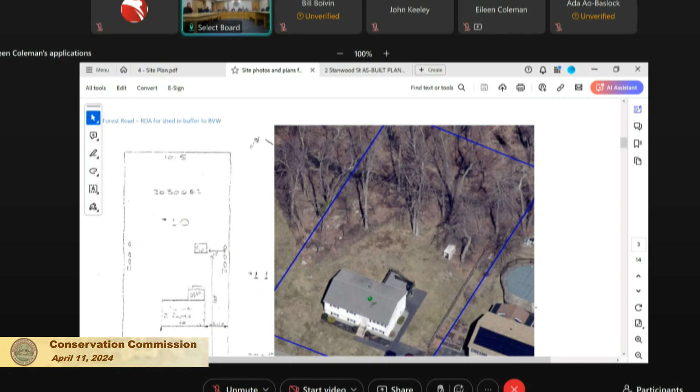Yeah, I will. So like Mr. Baslock explained, he wants to replace this very, very tiny little shed with something a little bit more substantial. There is a stream channel in the back here, which runs, I think west to east, and is at least intermittently full. There's some wetland very close behind the shed, and there's actually a little bit of dumping into the wetlands, so we put something into the proposed conditions for him to take that out. He wants to replace it in the same place with a slightly bigger shed. I don't have any issues with that bigger shed going in, it's just going to go in on a gravel pad. We would just like it to go no closer than existing, and for him to stop dumping the yard waste into the wetland, just move it off somewhere else. Really, that's it, it's pretty simple.

Sounds very straightforward. Okay, let's see if there's any other questions or comments. Ed? Nothing really, other than there's noticeably some grass and whatnot being thrown back there. That should be cleaned out and should not be dumped in that area.

Okay, Rob? I guess just one question. I know sometimes when we do sheds, we sort of have the elevated sheds with an air gap versus sheds that are in ground contact. I remember we discussed one in the floodplain where the building department suggested it be elevated. In this case, it's not in the floodplain, it's not in the wetland, it is pretty close to the wetland, so it didn't seem necessary to ask him to do something the shed manufacturer wasn't already proposing. Didn't really feel necessary to ask for something else. Yeah, okay, good question.

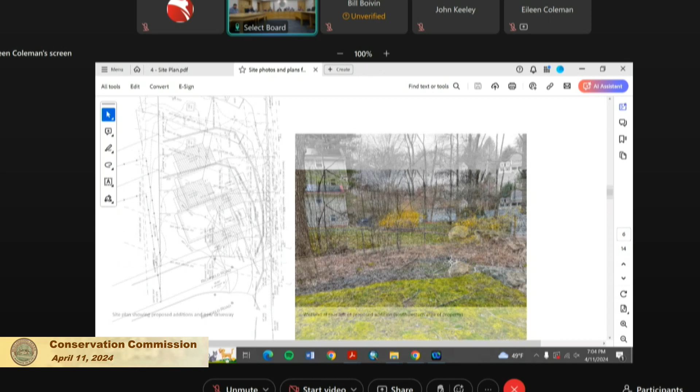This is the wetland sort of at the side of the house. This is the wetland that's been restored, and it's looking really good. This is the channel on the other side of the house. So just to reiterate, it's a pretty tight space they're working in. They are adding two additions, one of which is coming closer than the no-build setback.

But they are reducing the impervious overall, and I think this is about as good a project, about as well designed a project as it can be. They're also proposing to do some restoration plantings as well at the side.

Did I miss anything? We had already done some restoration plantings in the back, and so we'll be just adding, I think we decided on 20 plants that'll go along the other side of where the wetlands are that would be disturbed. Right, and those will be native, so he'll work with us or with his wetland scientist to choose something appropriate. It's just a few feet away from where the current driveway is now, but is going to be where the driveway is being pulled back after the construction.

And as it turns out, just looking at this again, the new addition is about the same distance from the wetland as the current house is from the existing stream.

Okay, so my recollection is that there was nothing further the applicant needed to provide us.

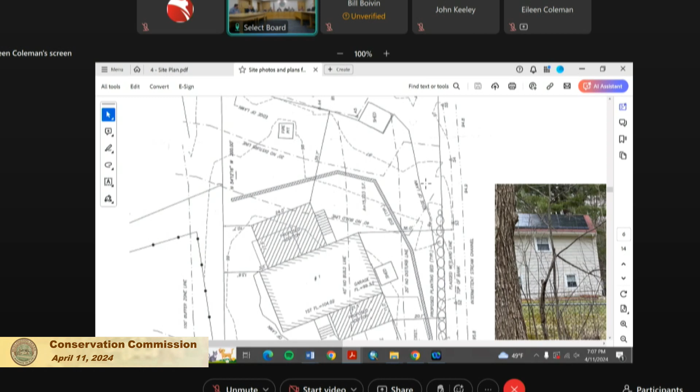All right, so everyone spoke, we're all set? This is a hearing, is there anyone in the audience who would like to make a statement about 1 Richfield Road? I had opened it. All right, that does not appear to be the case.

So, Mr. Collins, has Mr. Collins seen a draft of the decisions yet? He received it, I emailed the drafts earlier. Do you want to have a draft? Maybe we have a spare draft for you to look at, or you're all set? I've already been flipping through it, I'm set. You can also go on with it, we're going to review it, but I didn't want to, if you hadn't seen it. I have seen this, yes. Okay, thank you. We usually forward it along in case there's anything egregious.

Could I have a motion to close the hearing on DEP file number 122-699? So moved. Second. Okay, all those in favor? 5-0, are you abstaining? I'm going to abstain, yeah. 5-0-1, okay.

Now, do you want to review the document, Eileen? If you want, I can do it fairly briefly. He has seen it, if it's not necessary then we can move ahead. I didn't have any objections to it. Okay, so I'm just seeing if there's anything here that you do need to go over. The commission got it ahead of time, so I guess not, really, on the bylaw decision. It's all very straightforward and standard, if you prefer to leave it. Bonds, thank you, bond is 2,500, I think.

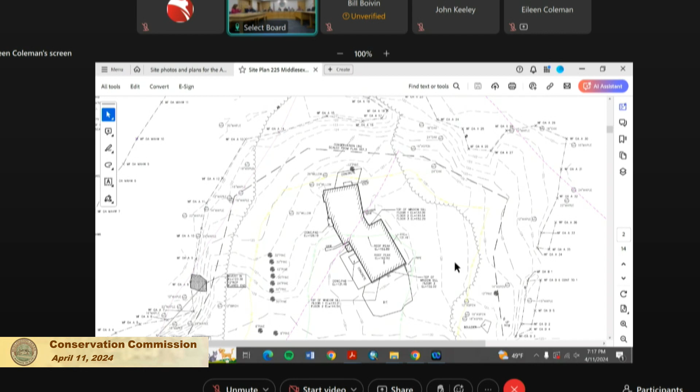Obviously, since 2016 was a pretty significant time ago, we had the wetlands reflagged by the same consultant that did it previously, so we had Oxbow go out there and reflag the BVW. There is an isolated wetland, and riverfront area associated with Vine Brook, and the other brook on the site is associated with local regulatory streams of Burlington, so it also has a riverfront area. There's only a small area, smack right in front of the Kent Cottage, that doesn't fall within a buffer zone of the river or the wetland area on the site.

As part of the previous application and this application, most of you have probably only seen the stone part of the Kent Cottage, but behind it is an ugly concrete block structure that was added onto it. When we were here previously, and previously I had met with the Historic Commission, which the project will meet again next week informally, it was understood that was going to come down, that there was no need to keep that portion of the structure.

So as we move forward, we're moving forward with the stone building, the front part of the Kent Cottage. It's in even more disrepair, if you can believe it, than it was in 2016. The inside is a mess. So essentially what we're doing is reconstructing the exterior.

And what we're doing is putting 2 residential units within that structure. So 2 townhome units, each with 2 bedrooms. And what we're doing here, this is the layout plan, is creating essentially a little residential neighborhood out of the Kent Cottage. Some of the logistics around this, obviously we're not moving the Kent Cottage, it's there at an elevation.

How do we get everything around it? The previous application had one large glass structure attached to it, not trying to mimic the Kent Cottage, but in contrast to it and showcasing it, with parking lots on the front and the side.

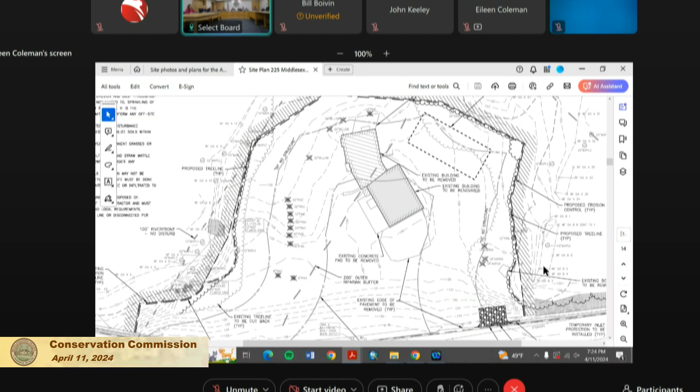Besides that, we did provide you with a narrative regarding our riverfront alternatives analysis. You'll notice it's pretty similar to the one we did previously. We're about the same impervious as we were when we were here before with the office building, as far as the addition of impervious to the park. I believe we're just over 31,000 square feet of impervious for the total site construction we're looking to add.

We do have a floodplain on the site, but we're not working within the floodplain. We are outside the 100-foot riverfront area, and outside the no-disturb and no-structure setbacks. There is now a habitat area that exists on this site—we're touching it when you bring it in and overlay the line work within this site. We're just touching about 900 square feet, right where that double catch basin is in the corner. Your future plans will have that; that line didn't get turned on for some reason in this set.

It's been put on the plans, and we have sent it to Natural Heritage. So it's been mailed to them, and they reached out to us, obviously, through you, John, and through Kristen, who had put her email on there, and we've sent them PDFs to follow up with the hard copies that they received.

So we'll be looking for information from them. We did go to Board of Health on Tuesday night and got approval. This is our first night, obviously, with the commission. We have a meeting next week with Historic, and then Planning Board starts next Thursday. So no revisions have been made to the plans yet. When I checked DEP sites, we don't have a DEP file number yet or comments.

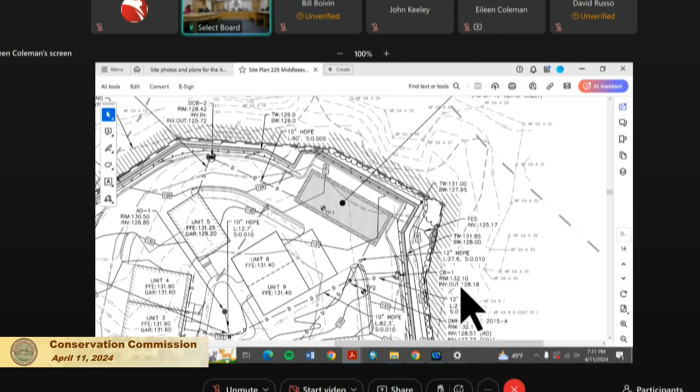It looks like it could be that, yeah. And you basically stack them next to each other, and they create - and they have a porous bottom. And they're filled with stone? Nope, they're open.

Okay, so there's stone around them. So, since we're on this now, for the benefit of the commission, what is the purpose of this structure? Is it to take clean water? Is it to take water off the parking lot as well, stormwater? Right, so all of the devices that we're using to collect stormwater end here. And so it's basically the same thing you'd see if you saw a StormTech system or a pipe and stone system. It's an infiltration system.

It's just what it does is it takes the smallest footprint possible, because you're not losing out on any of the curvature of, say, the pipe, and then you're only getting 40% of the stone. It's basically open as far as the boxes that go together. And so there is a section, though, that the pipe that comes from the double catch basin comes into that part of the system, into an area of the BMP where there's a section of these crates that are wrapped in filter fabric, so additional sediment can settle out in that row. It's similar to an isolator row you see with a StormTech, in that you wrap it and the sediment falls out in that area.

Right, we may come back to that, so the commissioners may have questions on it.

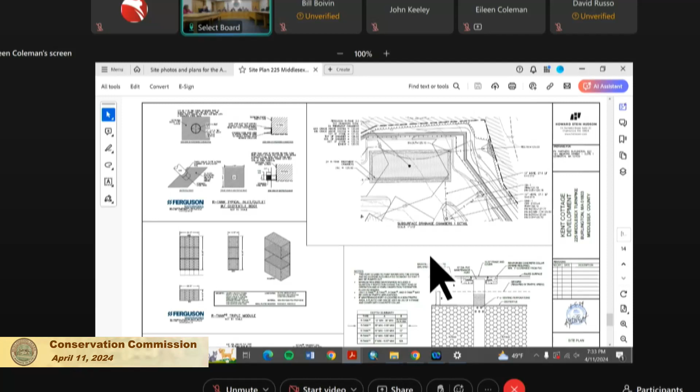All right, so let's start with Ed. Do you have any comment or question, or we can go back to you if you'd like? The actual road going around, what's the surface on that?

The driveway itself is pavement. You go right up to the garage doors of each unit with the pavement? With the pavement, that's correct. Have you considered pavers or anything like that? The reason I say is, I found it to be really useful where I am over at the Reserve at Seven Springs. And when that water comes running around the road and just happens to hit the driveways, it's gone.

Just curious, it's not something that's expected. Is that the fire way you're talking about? Behind your building, further down, there's like a fire access, and I think they made it out of pervious pavers?

Is that what you're talking about? Well, like that, but we all have pavers in front of our garage doors. Oh, you do? When it rains, are they pervious? Is the road water pervious too?

Do you know if they have the full profile of a porous pavement application under them? Yeah, they do. So have they deteriorated? That development's been there a while. I mean, after 10 years, it still works. I'm kind of amazed, to tell you the truth. I've never seen that before.

Is that something you would consider at least looking at? We could look at alternative materials for in front of the garage doors, yeah. Okay, the water never makes it to the garage door. That's the key.

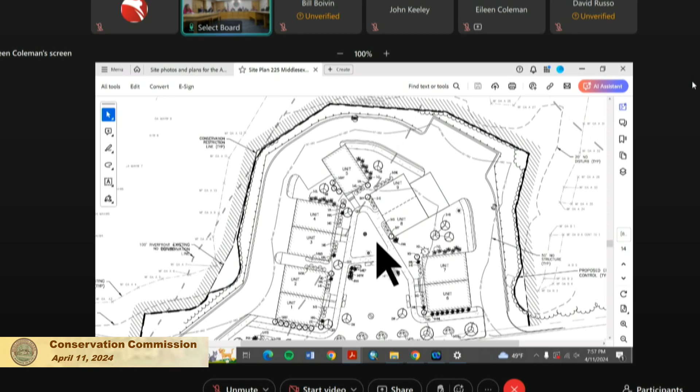That's the big square? No, it's the circle, the other DMH that's called out as a CDS - that's the hydrodynamic separator. Is that this one, right here? Yep, there you are - essentially a Stormceptor, it's another brand. Could you point to it please? I'm trying, is it this one or this one? So this is going to go to here, this drainage manhole, and then down to this manhole here, which is DMH2, which is the CDS unit. DMH2 is what it's labeled as, and right next to it says the CDS, that's a separator - it says CDS unit right here.

Next to the word DMH2... oh, CDS unit, okay. I saw DMH2, I didn't read the CDS. And then it goes into, so it's like a cyclone separator. It is, a Stormceptor, yeah, okay.

So what I gather is that the rooftop runoff from units 1 and 2 goes to DMH1, and then units 3 and 4 also go to DMH1. Is that correct? That's correct. And then that feeds over into...

DMH2 and CDS2, which is inside there. CDS, yeah, and that feeds into the infiltration. Correct. And then unit 5 seems to feed into DCB2 up the top. Yeah, unit 5 is lower in elevation, so it's feeding into the double catch basin.

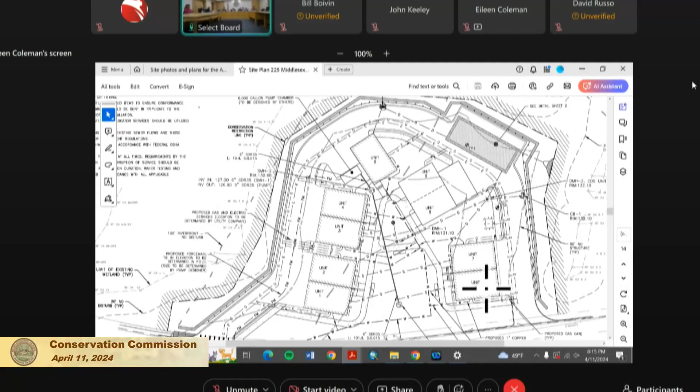The last question I had is, do your plans mark the trees to be removed so we can see them? Are they on the plans? The ones that are not part of the forest are marked - the edge of the tree line itself has not been marked, only the ones that stand within the field. There's 19, I believe, larger trees.

We could certainly look at it when we're out there, and I can check to see. Those ones around the existing buildings - these are all marked, next to all, one way around. Okay, these ones are marked? Is that what you mean?

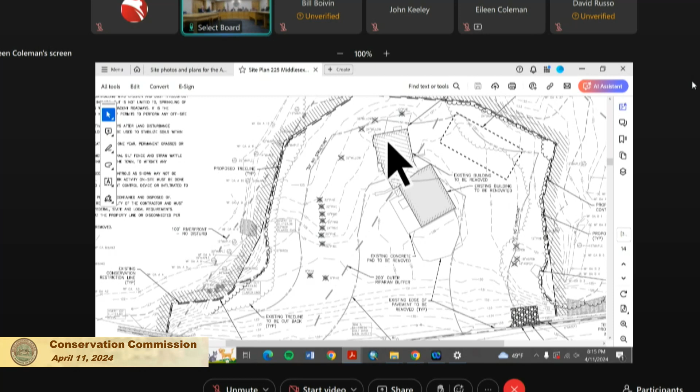Which sheet is that, and these? They're marked here - there's some area within this existing tree line. So they are marked, is that what you're saying? The ones in the center, kind of - but how about the ones around, there's some marked here. I'll just check with the surveyor and make sure those are all the ones over 12 inches.

Are they going to be marked in the field as well, before they're cut, like with a ribbon? Yeah, usually that's typically required. Okay, that's on Plan C4. So you'll check to see if the plan has everything that is being removed on it, that's over 12 inches. Okay, over 12 inches. All right, that's all I have.

Is there anyone else? We've had an interactive discussion here - the commission contributed quite a bit. Should we go through the list of what I have, or can anybody else add to it if I miss stuff? One of the things our staff, John and Eileen, need to do is field verify the bank flags and the BVW flags.

Something about the phosphorus calculation - did we have something required, confirming the phosphorus calculation? Yeah, okay.

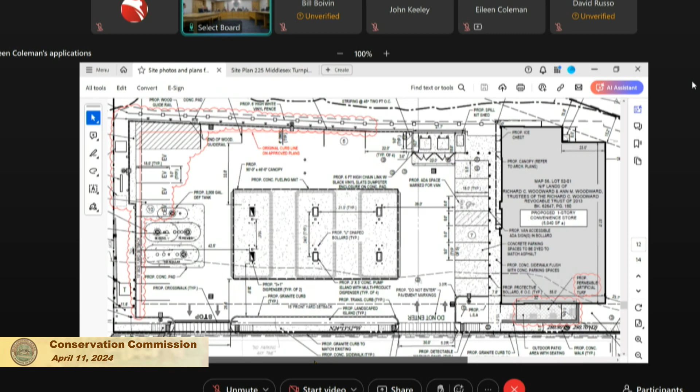So the request is for a minor engineering change because they expanded the pavement a little bit, and they're putting in the artificial green stuff to make it pervious on the other side to sort of compensate. Yes. Okay, let's see if there's any comments.

John and Eileen, do you have any comment on this? Not really. I explained this was happening last time, that they had moved the catch basin, which moved the curb line a little bit, and that they were proposing to put something else down here that might be artificial turf. Your suggestion was, if they can make that a pervious paver or something, we could skip the MEC. It was already in place by the time I went to them, maybe the next day. So, okay, it's in place.

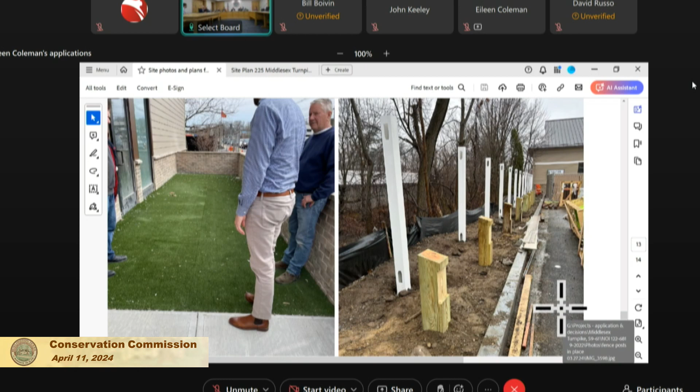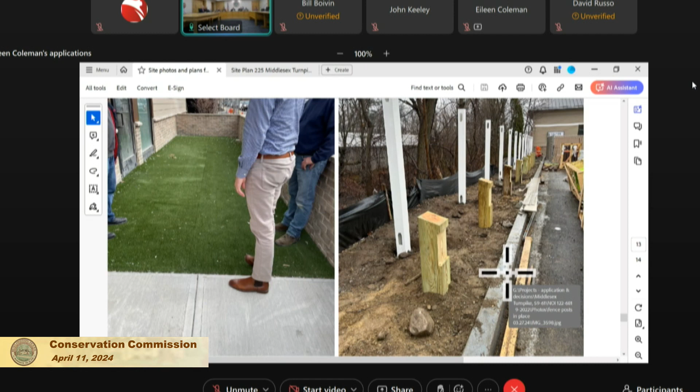It's actually pervious. I just have some pictures here to show you what the turf looks like. It's a very small patio right on lovely Middlesex Turnpike where everybody will enjoy eating their hot dogs. And this just shows you the curb line. It was supposed to be a little bit closer this way, and it just got pushed out a few feet. Everything else is looking pretty good on there.

This is kind of a nifty picture. There's the fence, right in between. You've got the developed side on this side, and you've got the bank, the very steep bank towards Vine Brook on that side. They had a bit of a washout, and it's pretty stabilized now. I think that's going to come along pretty well.

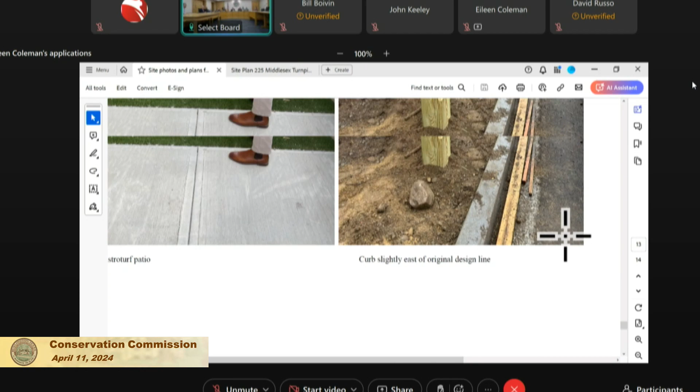So we made it a minor engineering change. Up to you guys what to do about it. I mean, these things happen in terms of the moving of the catch basins. I don't know if you have anything else to say about that.

All right, let's see if anyone has anything else to say. Kent, anything else? Nothing to add. Indra, anything else on this? Nope. Ed, anything? Nope. Rob, anything? No. Bill, anything? Just one question out of curiosity.

What's the substrate for the AstroTurf? What goes under that? 12 inches of crushed stone. Crushed stone, and then that's just laid right on the stone? Yep. Aren't there two layers of things? It's described to me as 12 inches of crushed stone. And then, what's underneath that? I think it's the subgrade material. Okay.

My assessment is that the area that was necessarily expanded in pavement was in the inner riparian zone and was a valuable space that would have been nice not to have had that happen, obviously. The area you're replacing it with, the artificial grass along Middlesex Turnpike, is probably about the least useful space to have as pervious relative to natural resource protection. So it begs the question, is there anything else you can do? And the answer, of course, anybody who's been on the site, I think the answer comes back no. I don't know what else we would ask, and Bill would certainly ask it, or anybody else here would ask, if there was something else you could do that would make it a more equal swap. But I just don't see it.